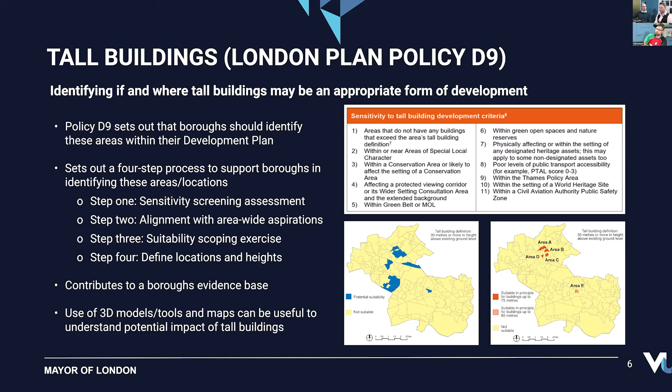Going back to what I was saying earlier, I think the use of 3D models and tools and maps can be really useful to understand that impact of potential tall buildings. Very hard to do that in 2D. It's definitely easier, I think, if you can get a 3D perspective, definitely.

So I thought I'd now talk about another bit of guidance, the Optimizing Site Capacity, a Design-Led Approach LPG. This document sets out the London Plan's design-led approach and relates to policy D3. It's about requiring the consideration of design options to determine the most appropriate form of development for a site that responds to its character and capacity for growth, by setting design parameters, or a strategic design code for specific sites or areas being master planned, to provide clarity and certainty over development and redevelopment. Good growth across London requires development to optimize site capacity rather than maximize density, and this guidance provides a framework and process to undertake this.

The document also provides a framework to determine a site's indicative capacity if it's a residential site or has a residential component. It uses a toolkit which itself uses SketchUp to model the massing and layout of development sites in London. There are many 2D and 3D models and software out there that can be used for this. We use SketchUp in the model, but there are others, such as VU.CITY, and many more.

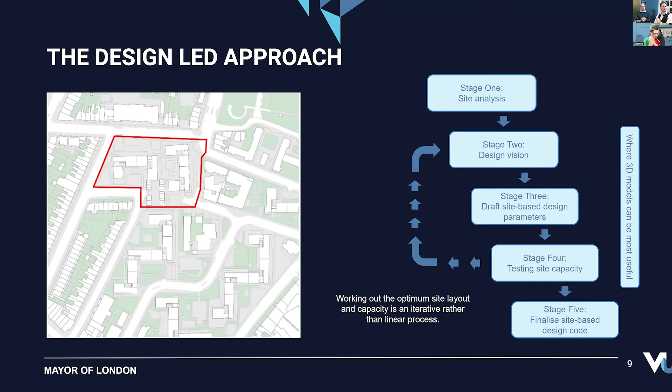We have a minute until we have to move on, Alan. Oh, goodness. Okay, yeah, that's fine.

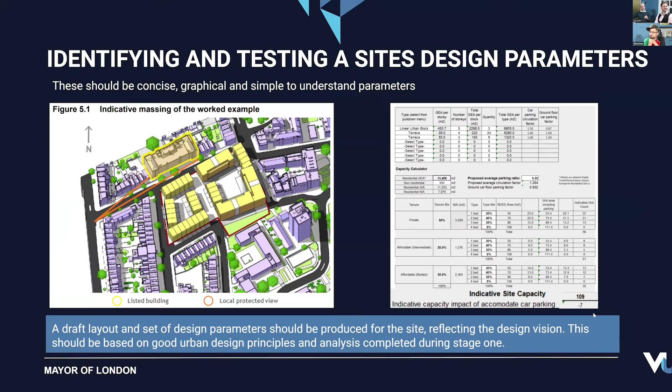This slide shows what you can do with 3D models. We use SketchUp in the guidance itself, and it's important to reiterate that the design parameters should be concise, graphical, and simple to understand.

You can see that by doing this, you can look at the site through different views - looking down different streets to understand the enclosure ratios and what it feels like on the street, as well as other views.

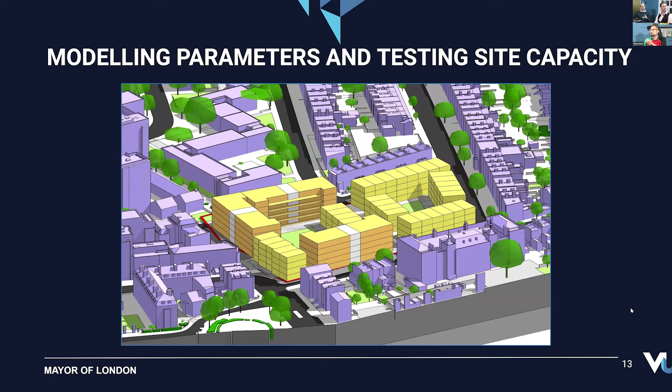Before I hand back to Christopher, I'll touch on strategic and local views, relating to policy HC3 and HC4 of the London Plan. The London View Management Framework, or LVMF, sets out 27 strategic views across London, focusing on particularly 3 of the most strategically important landmarks. The LVMF provides protection of these views via designated protected vistas and protected silhouettes, as well as management guidance for each view.

It's worth saying that we're actually going to be looking to review this guidance and update it, and we're going to be undertaking that in the coming months. We also aim to, through this process, provide more guidance on how boroughs can be setting local views, and I think 3D tools and models can be really useful in that respect.

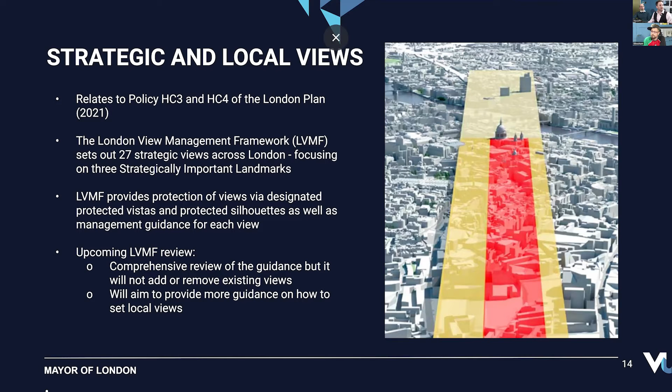But before we get into the tools, why visualize your project? Why bring everyone into 3D in a live environment? Because politics, I love this quote from Naomi Klein, politics hates a vacuum. If it isn't filled with hope, someone will fill it with fear. So if there is a void of what does this development look like, from where, then you are just opening yourself up to all sorts of fear. And we see it all the time.

So anyone who subscribes and buys into VU.CITY, and this idea of just visualizing and being extremely transparent right from the get-go, buys into this idea that if you want to really take control of the narrative, then you can get there first and be precise about what can be seen and where.

What are we? Well, we are a smart city platform, and our goal is to leverage cutting-edge technology, including 3D modeling, artificial intelligence, and geospatial data to enable cities to be designed, simulated, evaluated in a virtual environment, leading to more informed decision-making, better outcomes for communities and the environment. And it's putting everyone together in one interactive platform to be able to have these lovely live conversations.

This is how the model will one day bring everyone together. We're very much working on web map technology to bring in citizens more, and that's definitely something that's in the R&D we've been looking at for a long time. Department of Leveling Up, the round 3 funding did for the Southampton web map project, and that will be filtering its way out in the coming couple of years. But at the moment, we are very much specializing in supporting this relationship between local planning authorities and the builders.

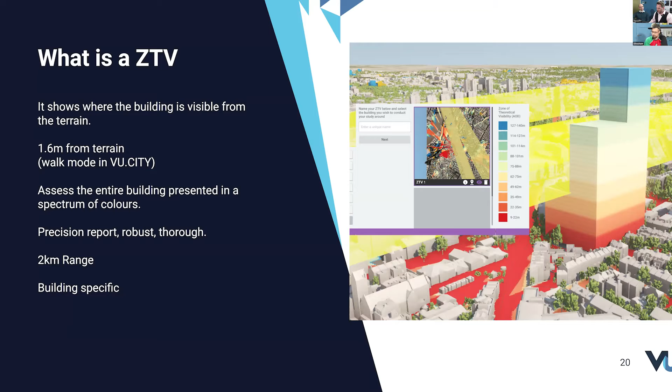And we have a 2-kilometer range on our zone of theoretical visibility within the platform. If you want something bigger than that, we could turn that around for you as well. And this is what it looks like from above. So this is something that Ethesham rendered. You can all render these, and they look very lovely.

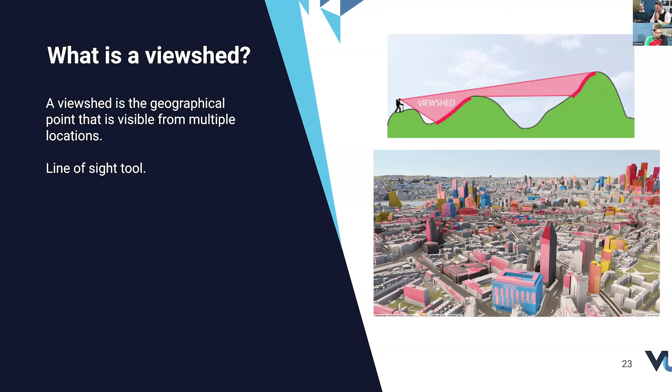One more thing about this, we have 4 cameras and 4 points, and you'll see in this diagram here that we have different levels of coloring there. The dark pink means it can be seen on all 4 cameras, and the lightest pink means only 1 camera can see it. So that will indicate what it may be able to see. But line of sight is very much like a ray of light, and the way we do it is we create it through the camera study.

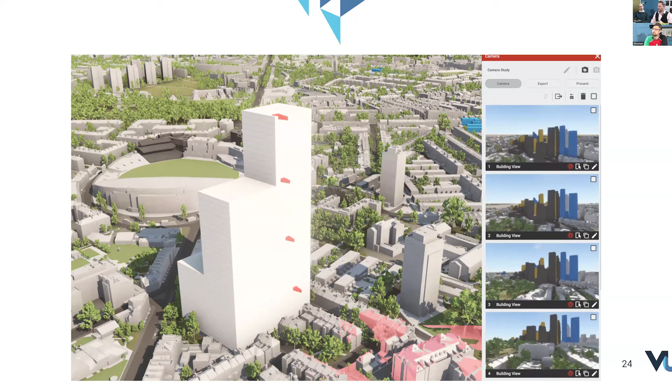And as you can see, you place the cameras on here. In this particular use, we're not looking at it from a subject point of view. We're looking at it from an object point of view. So if you want to see what part of this building on this side is visible, that's when you would use it, and you would stick the cameras on the side of the buildings.

And this is what it looks like here. This is another render I did, and this is what all those 4 cameras can do. So that side of that building, you can see its visibility really clearly pointing straight out. I believe that's easterly.

So putting them together now, zone of theoretical visibility, it's a static report. It's based on one whole building, and it's around that radius of the building. And once you've rendered it, the report is done. With viewsheds, they're point focused, it's live, and it doesn't have a limit. It will be on the limit. The only limit is however many tiles you can load. And the best place to do that is a camera study.

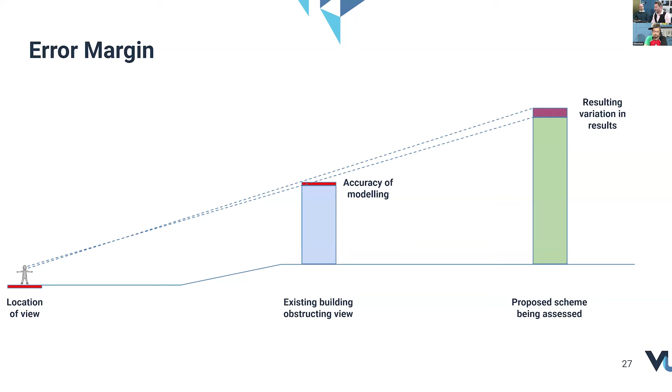Let's have a look at these questions coming in. So Alicia, hello Alicia. Does this feature work for masses built in VU.CITY or only imported models? It works for both. And yeah, in the demo that I'm going to do today, I'm going to create a building in VU.CITY. I'm going to create the massing live. Okay, and we may have some feedback issues. Okay, fine. Go for it, Ethesham.

Yeah. Okay, so I guess the first thing to introduce is the hub. This is where you will launch VU.CITY, but it's also where exported screenshots are saved. It's also where you'll be uploading your FBXs or other data types. And you can, when you launch VU.CITY, you have the choice of launching by the desktop or the cloud. I'm going to launch via the desktop.

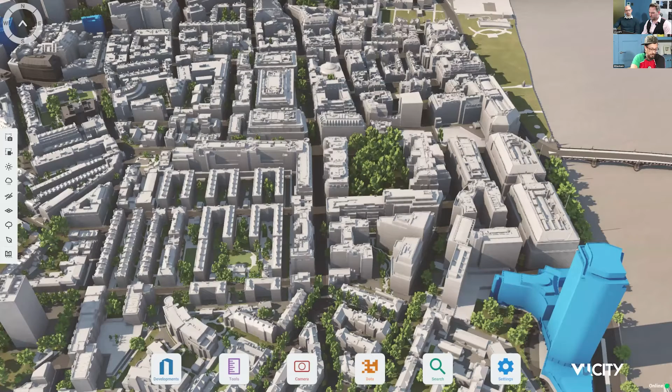I'm going to download - there's been an update to our assets. This is a section where, on a daily or weekly basis, we'll be updating the VU.CITY model. It could be minor changes like adapting a building or updating a whole tile, or adding a new tile to a city. We're in London, but we also have coverage in Belfast, Dublin, Manchester, and Birmingham.

I'll start by loading up the scene, and I'm going to create a massing somewhere which is obviously not going to be feasible, i.e. in Parliament Square. We're picking this area because we want to use the Houses of Parliament as a sensitive building whose visibility we want to protect from sensitive views. So I'll go ahead and create a massing now.

I'll press Shift to snap at 90-degree angles, and I'll make this building 60 meters in height.

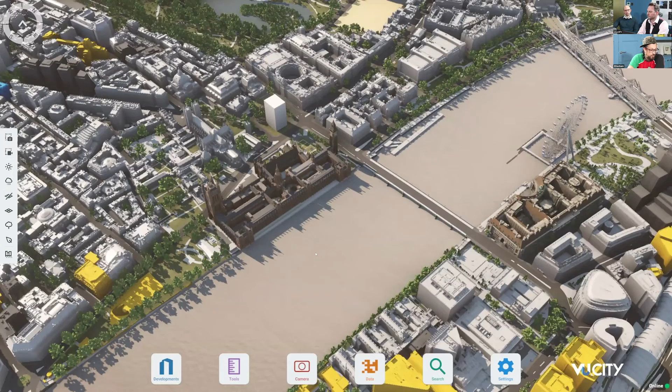The first thing I'm going to do is run a quick ZTV on this to assess where it will be visible from, as Chris mentioned in his slides.

For ZTV, all you have to do is type in the name of the report. I'm going to set it to 1.5 square kilometers in range, and I'll set the granularity to 9 - basically this suggests the size of your sample area, so each square will represent 9 by 9 meters.

Obviously the smaller, the finer you go in detail, the longer the ZTV study will take to render.

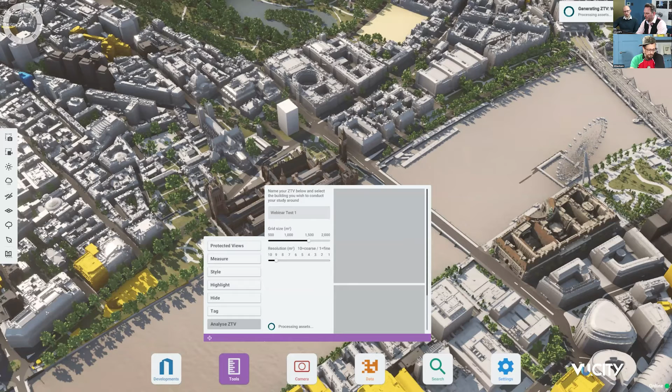It's worth reiterating that I was around before VU.CITY existed, and this process would typically take a couple of days to a few weeks to produce, depending on the size of the area. So one big gain in using a live platform like VU.CITY is that we're hoping we can really speed up the planning process and the ability for people to rapidly iterate their massings and designs. I think that's what it comes down to - how quickly can you run these reports, and how hard is it to actually get to the point where you get the report.

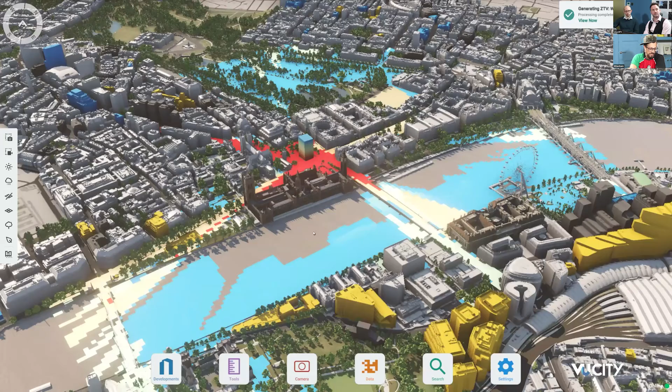All we've done here is type in the name of the report and tweaked two things, and here we go - here are the ZTV results. As you can see, the building has been split into 5-meter increments, and everywhere that's red on the ground at 1.6 meters, we'll be able to see the bottom of the building. The blue areas on the ground and the yellow areas are between the middle and the top of the building.

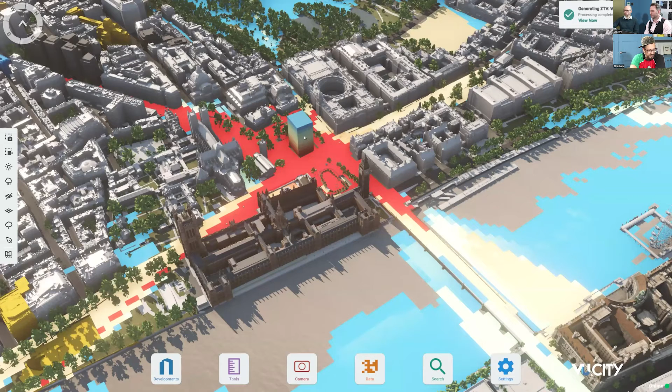I would like to assess this further. I understand that various heights of this building are visible around the area, but I want to find out a bit more about that - I want to assess the building more. So I'm going to run a viewshed on this building.

The way we do that is by setting up our camera study. I'm going to select that building as the focus point, and I'm going to place my cameras based on these results. I'll go down here onto Westminster Bridge, back, maybe the other bridge here.

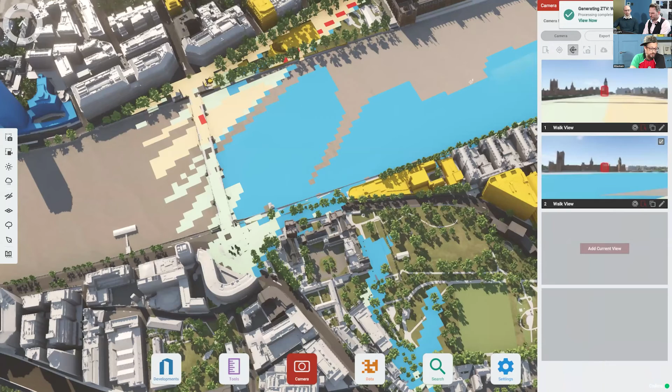Also worth mentioning is that our ZTV results and our viewsheds do not take into consideration the trees. So I'm actually going to switch off my trees, and to improve performance of VU.CITY, I'm going to turn off the shadows as well.

I always turn off shadows - you only really need them on for daylight studies. I feel VU.CITY users take it for granted that we have almost instant access to the model, that it loads in and out really quickly, and that we have shadows. But these are the most intensive things for an app to do - to load in millions of polygons, and then to double the calculations by adding shadows is really performance intensive. So it's worth mentioning that if you don't need shadows, turn them off for a better experience, because you're really putting your graphics card through its paces.

Ethesham, Wolfgang here has just asked if it's 9 meters squared or 9 by 9. It's 9 by 9 meters - it's not 9 meters squared, Wolfgang.

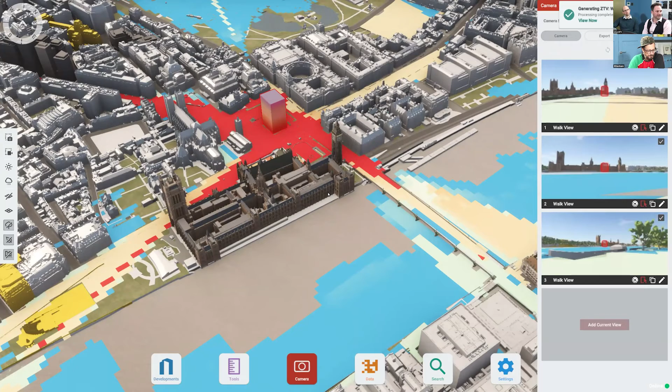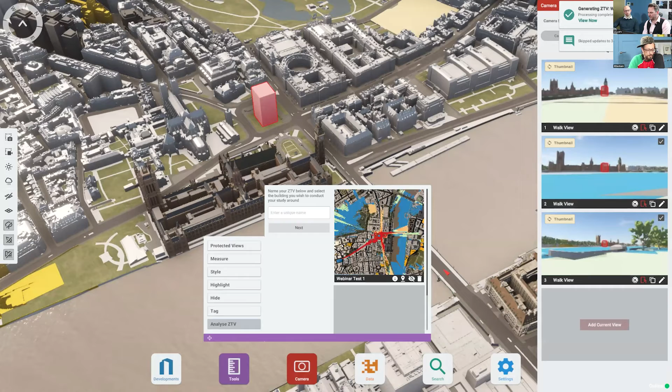Okay, so I've set up my camera points. I'm going to unhighlight my massing and turn on the viewsheds. The first viewshed I'll turn on is going to be the one on Westminster Bridge.

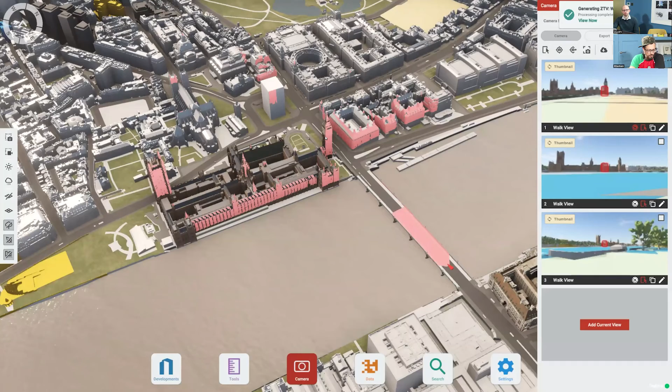This calculation is a one-time calculation, so it won't happen every time I click the button for the other views. So here we go, here is the first viewshed result. And as you can see, from the viewpoint on Westminster Bridge, Big Ben is massively occluding this building.

Let's turn on the other viewsheds here. You can have up to 4 concurrent viewsheds at a time. If you saw that yellow flashing, basically every time you hover over a thumbnail, it will isolate the viewshed results. So as I go down, I'm able to see, okay, this camera emits this viewshed. And if I turn them all on, you have the accumulation of all those viewshed results.

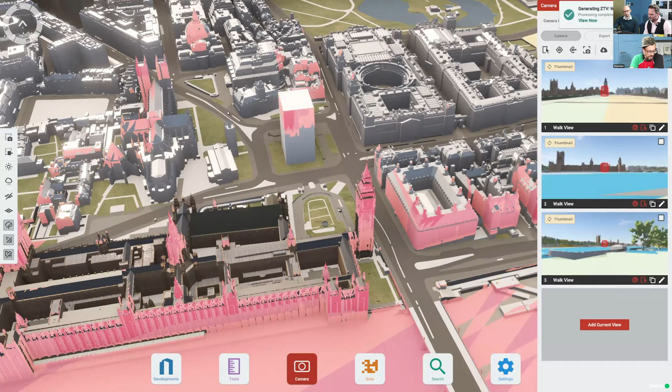That's a pretty incredible shadow it's casting as well. I think it's testament to the accuracy of that LOD4 model.

So based on these results, I can understand that if I just reduce the height of this building by half, it will no longer be visible in any of those viewpoints. But I saw that one side of the building is actually less visible than the other. If I go back to 60, you'll see that if I take away the southern facing walls, maybe I can get a bit more height than 30 meters.

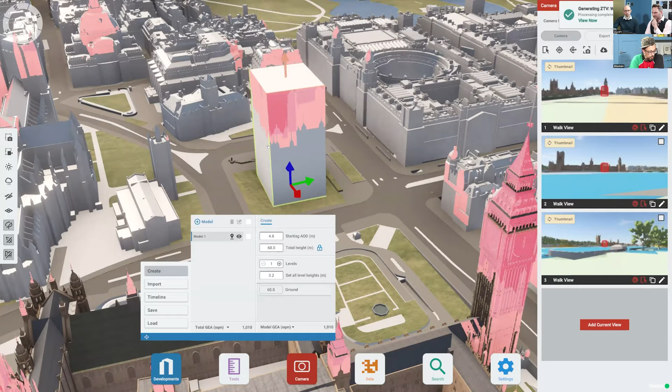So I'm going to now jump into my massing and change the footprint of this building.

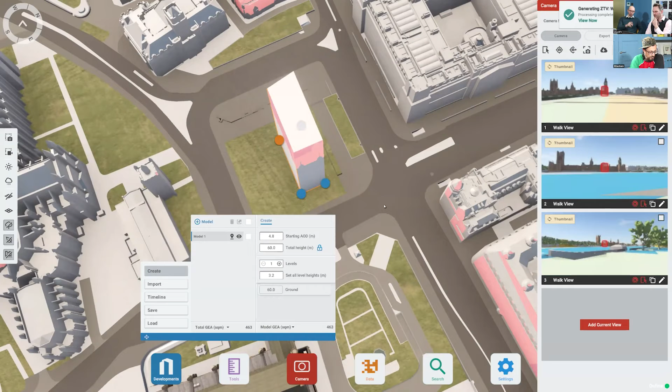And it's worth saying as well that one of the LVMF views is actually from Parliament Square. So I'm not sure this building at all would ever satisfy that. No, but we won't go there with this.

This is a completely hypothetical scenario. Indeed, absolutely, indeed, just to reiterate.

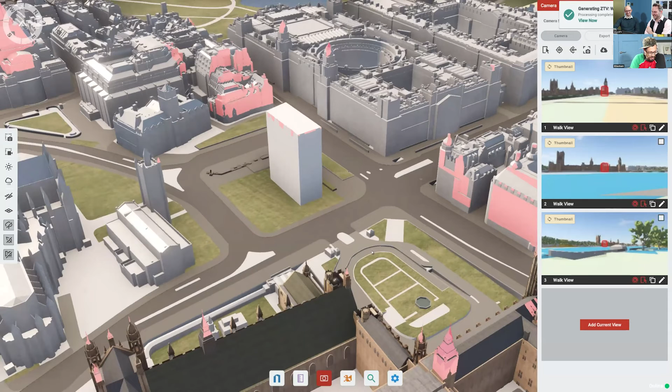Yes, so I've now reduced this massing by 40 meters. As you can see, there's a sliver of visibility, and if we go into the viewpoints, we can see what that impact actually looks like.

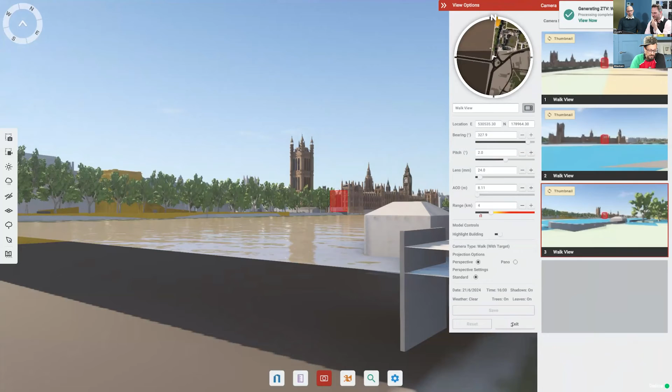So I'm going to jump into these positions. I'll turn off the viewsheds actually, and I'm going to just scroll through the viewpoints. There you go. And actually, I want to scrutinize this building even further and use the viewsheds in a slightly different way.

So what we just did there is we did a zone of theoretical visibility to find out what could be seen. We then went to the points and placed cameras. That's using the line of sight, about the subject, as if the subject is standing here and looking there, what can they see? That's how we were able to reduce this down so that you can't see it towering over Parliament.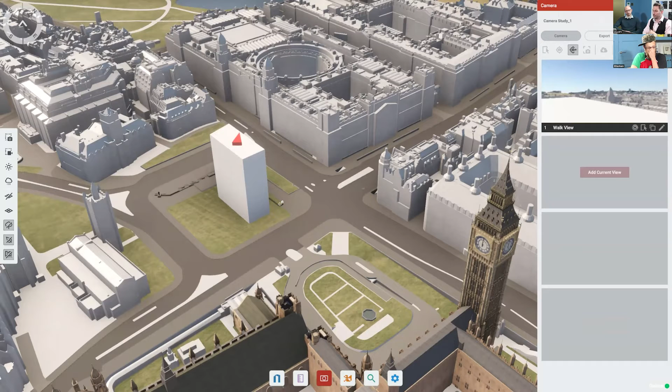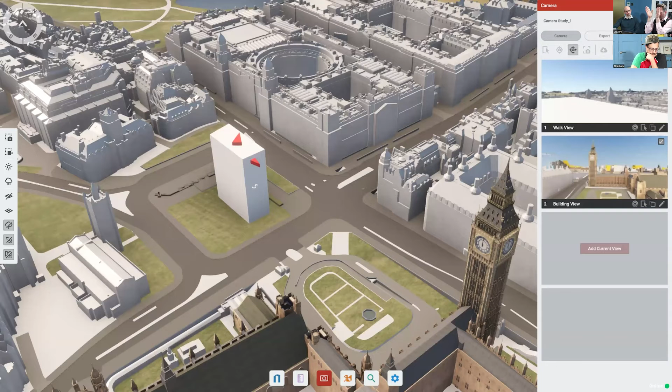And now we're using the viewsheds to do something else. We're now saying, well, who can see this object? How many subjects can see this object? This is where the Pano 360 comes in, because this is where we're making the whole camera wide. We're not looking at just one human sight, we're trying to look at who can see this area. So this is very much a case of subject rather than object. We're seeing which subjects can see the object rather than the other way around.

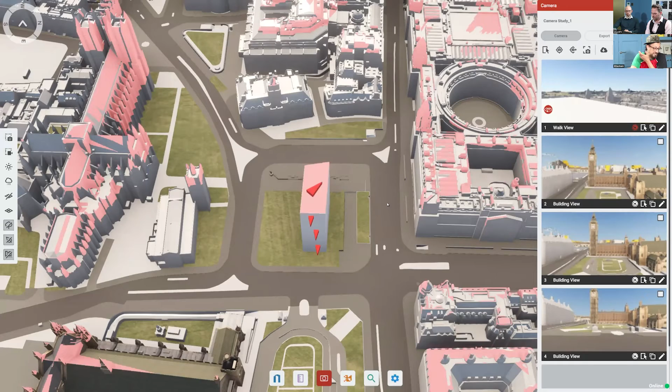Okay, so while you were speaking there, Chris, I set up the camera on top of the building as a 360 camera. So that, as you may know, can be exported as a 360 camera and then viewed on web pages as a 360 view. But I'm going to turn this view into a 360 view shed. So if I zoom out, you'll see, this is essentially behaving like a ZTV now.

And one of the key benefits with using the viewshed to do this is that it's actually limitless. We can scroll to infinity and the viewshed results will still show based on what tiles have been loaded. If you're on the desktop, and I was doing this the other day, I've got the cloud to do about 6 square kilometers.

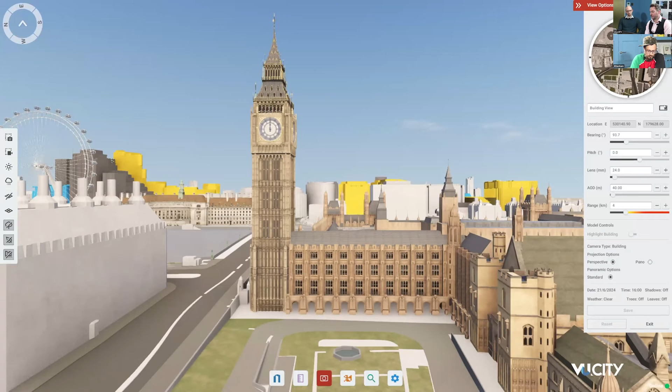That would increase the range you can do on a ZTV now quite significantly, especially if you put the object at the bottom of the screen and had the whole northerly view, then the easterly, westerly, south, pasted those all together, and also rendered those in an orthographic, like a top-down view. It's like a bird's eye, so you can zoom in. We can probably have a look at that once we finish this.

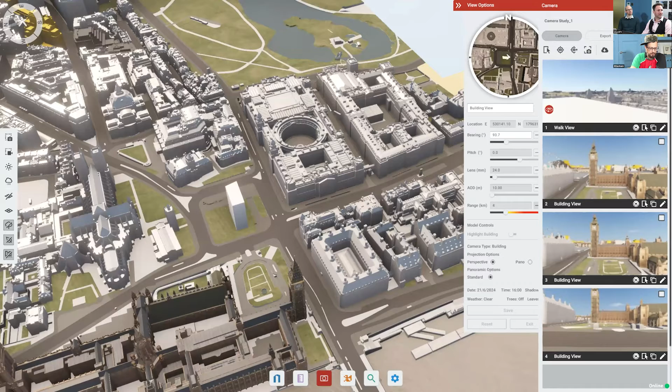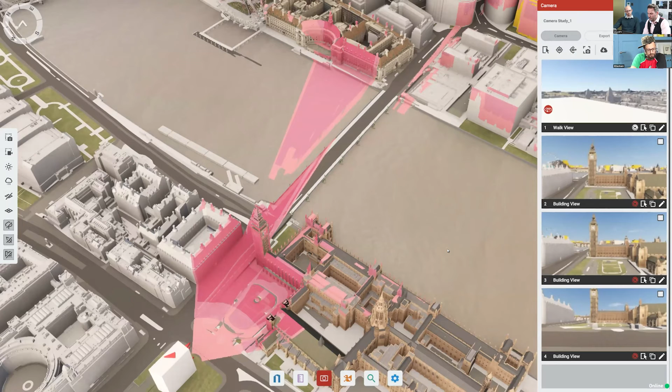Someone has asked, does the desktop run better than the cloud? This is an interesting question because on the desktop everything is local. So if you have a powerful enough computer to run a desktop, and they're not the most expensive gaming laptops, you could probably get a tower for £500-600 that would do it, and you can get laptops around the $800-900 mark that will do it as well. But you can run the desktop.

All you have to do on the cloud is tweak the resolution, make it 1920 by 1080, and we can show you how to do that. I can say a little bit about the difference in performance. Generally the graphics cards running the cloud are very, very powerful, so it should be smoother on the cloud in many instances.

The reason I'm not doing so in this webinar is that I don't want to throttle the web connection we've got, because at the moment I'm screen sharing and running VU.CITY. If I was running on cloud, I'd be streaming the video signal of the VU.CITY cloud instance. We decided to do it this way today for that reason - to take the burden away from the internet connection, I'm running VU.CITY on my laptop. If anyone has children at home who like streaming games, you'll know the second they're playing that game, your meeting is done. It's very much the same - you are streaming a high performance model through a gaming engine, so we just need to bear that in mind.

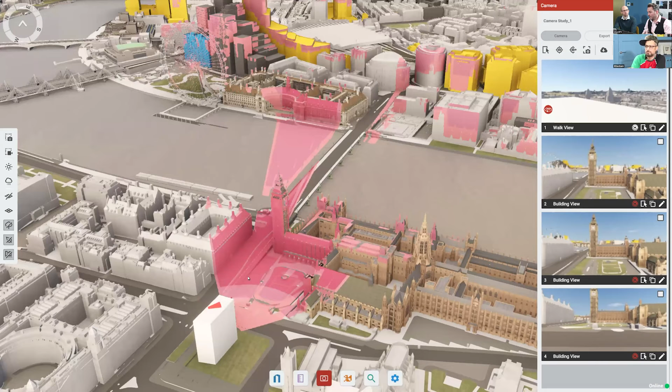And I'd say, don't even use Wi-Fi repeaters either, because that introduces an extra level of latency. What we're trying to do is make it as simple as possible, which is why we're actually improving our stack and making it more and more efficient. Some of you have noticed the platform is more stable than it's ever been, and the cloud experience is better than it's ever been. We're just going to keep doing that.

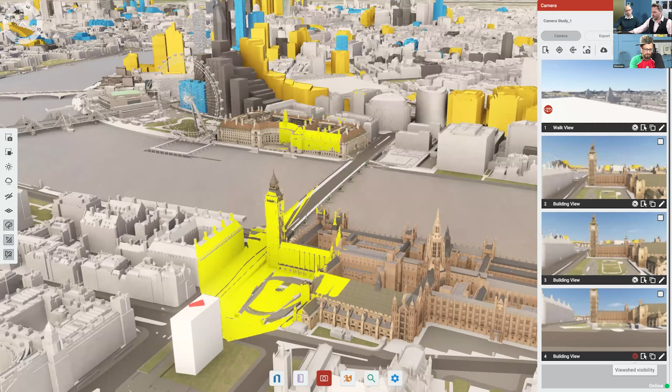Yes, correct. Ethesham, if you want to just show that. It's just a camera study. All you're doing is setting up a camera, and whichever camera you want to turn into a viewshed, that little fuzzy sun almost icon represents a series of view cones, viewsheds, in 360 degrees.

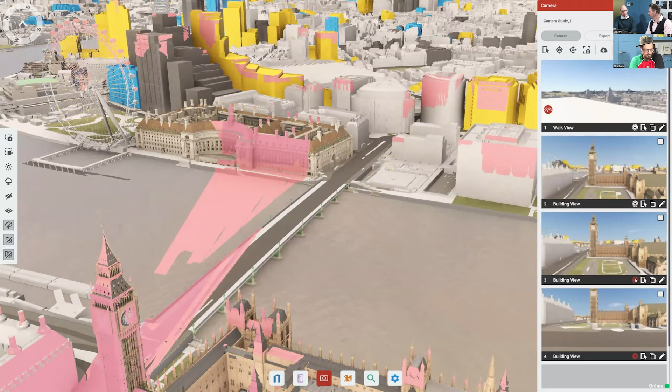Can I ask a question? We've looked at putting the points on a massing that is theoretical. Could you do that with an existing building? I'm thinking particularly a kind of church spire or something like that, so you'd be able to see the local views that have a view to that heritage asset or that local spire.

I can do that now. Shall we do that? We did that on St. Paul's the other day when we put them all around the bowl, seeing who in London can see that. In fact, I'm going to render those.

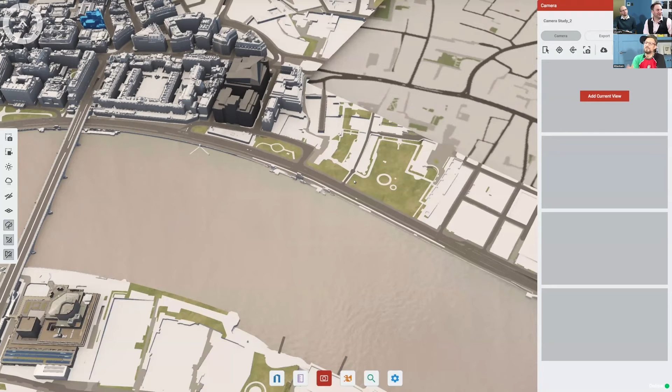I think that's a really useful aspect in terms of Matt Felton, a character from the past. Lovely to see you. Matt is one of our former VU.CITY team, spent many great years. In fact, Matt worked on viewsheds, didn't he? He did indeed, thanks for all your hard work. He's at Bentley now. Matt, thank you so much for joining us today.

So what was the maximum viewshed line of sight distance? Well, the distance is infinite. It will go if you just keep scrolling in VU.CITY, it will just keep shedding the viewshed. But then you'll start to unload tiles as you're moving away, so it's dependent on how many tiles you have loaded in your scene, but it is technically infinite.

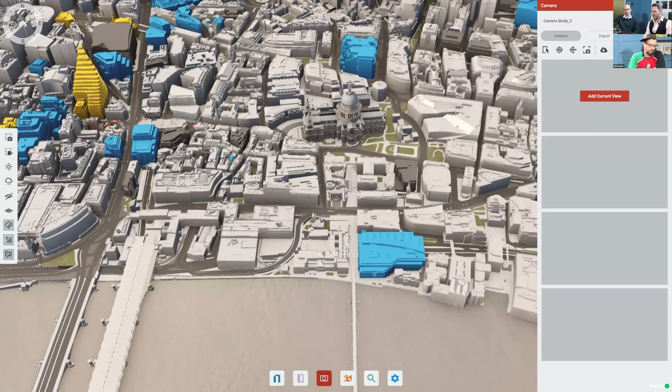So as, or at least the bounds of the tiles, yeah, but in loading those tiles we just have to be sure that anytime we're going to load a lot of tiles and look in one direction, we need to do that in a camera study. That's the safe place to do that. And I got it, I think, 6 square kilometers, and it did that all orthographically top down quite easily.

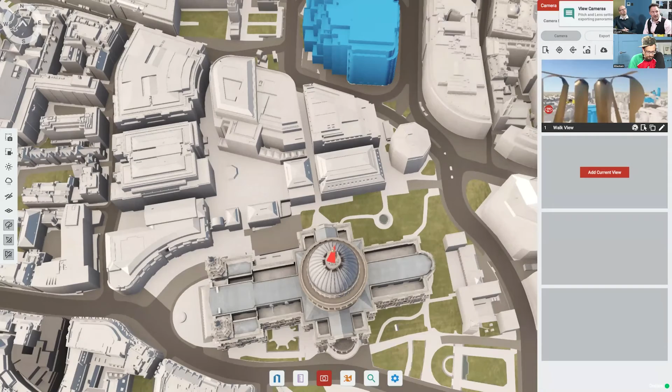An anonymous question here: can you use this tool in a countryside setting? Does it pick up terrain levels? Yes, it does pick up terrain levels, but obviously it won't pick up trees, unless Ethesham, if you put in your own trees as models, it would pick those up. Yes, it would.

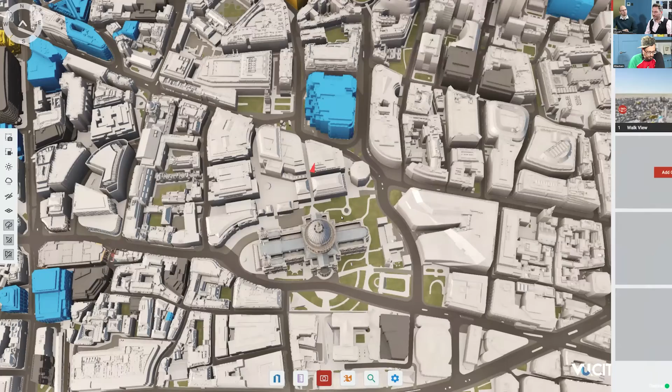So if you do want to add trees, you obviously wouldn't want to add every single tree in the platform, but if you're looking at a more narrow view and the trees were particularly important, you could place trees and replace the VU.CITY trees with a standard tree model, and that would work. I would suggest not having too high a poly count for your trees if you do import them - try and reduce the poly count.

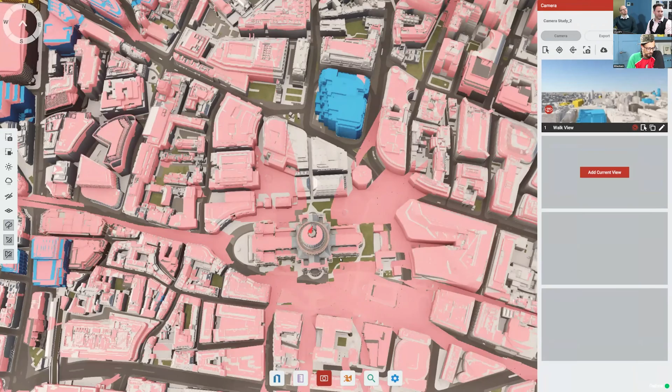And one more here from Matt: can you export the viewshed as a shape file or an image? Not yet as a shape file, but you can export it as an image.

So what I'm doing now is I've placed a 360 camera on top of the spire of St. Paul's, and I'm going to set up another camera right here and make it perfectly aligned to north and facing down, and export this image. There you go - it's just a case of rendering the images live through the camera studies, through the export. And here's the St. Paul's spire. I'm now going to export this image and let it load.

I think someone asked me about a shape file - I think it was Andrew - someone asked me the other day about exporting the shape file.

VU.CITY still offer the service of rendering ZTVs on a case-by-case basis outside of the app. When we do that, we render it into a geographically located image, which can then be imported into GIS software. That's a common workflow people require with their ZTV so they can use it in QGIS or other GIS platforms. So we are aware it would be useful for our ZTVs to also be exported into a GIS format usable in GIS software, so we would like to do that.

It's just that there are so many things that we could and should be doing, and we have to find the right strategy and order to release these features. But it's definitely on our radar - I would love for that to be enabled. We would definitely like to be able to do that. Shape files would be very useful to anyone.

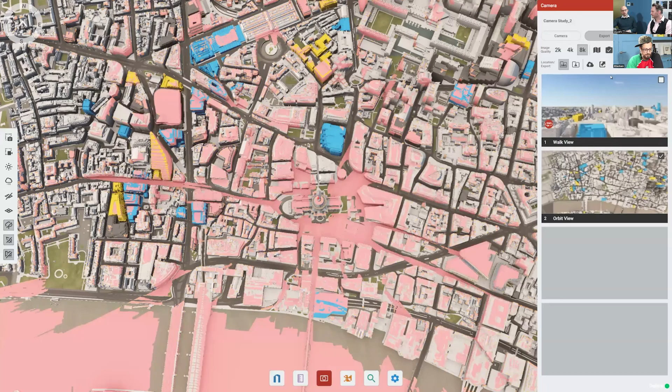Atmospheric haze isn't accurate - we do have a fog system and a daylight system that has fog, but I wouldn't say it's based on physics, it's a visual effect. It is quite nice though. That's a really good point, because that's an aspect the LVMF sort of considers and is aware of.

While we were talking, I exported this image in the hub, and here it is. You can zoom in and inspect it in lovely 8K - I've been doing some 8K renders on this and it's extremely powerful.

You may notice this open area here - I was a bit concerned, but it's because where I placed the camera is just in front of the spire, so the spire itself is occluding this section of the results.

When I looked at St. Paul's the other day, we had to stick the cameras on the outside of the bowl so it wasn't in the way - you hadn't have those ornamental pillars in the way.

So I'm just using the hub now to annotate this area. And that's another feature - you can now annotate on the hub photos and talk in greater detail.

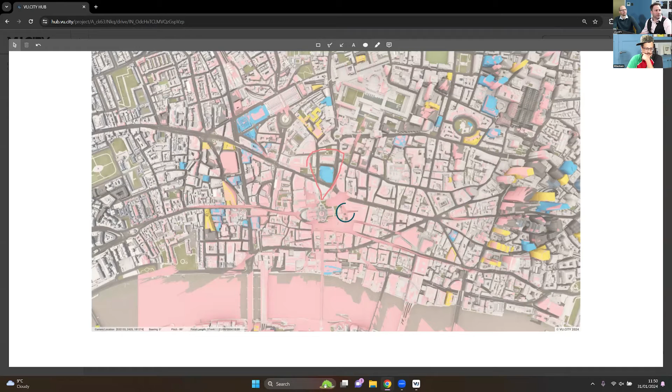Another question here: can we remove an existing building model and put a new one on it, like a building extension or a rebuild project? So that's essentially just the hide tool.

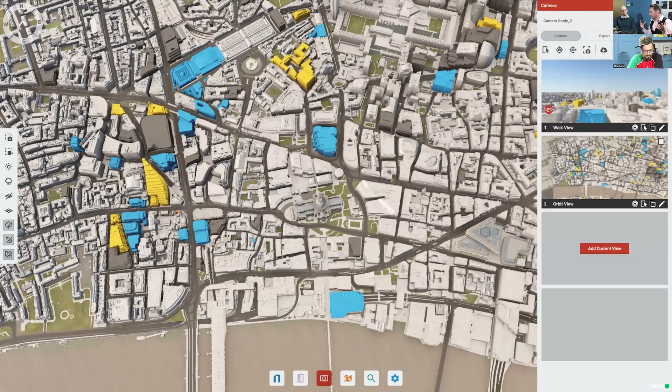Our hide tool just had a big update end of last year. You can remove individual buildings, but you can also draw whole sections of buildings and trees to be removed. I can show that right now.

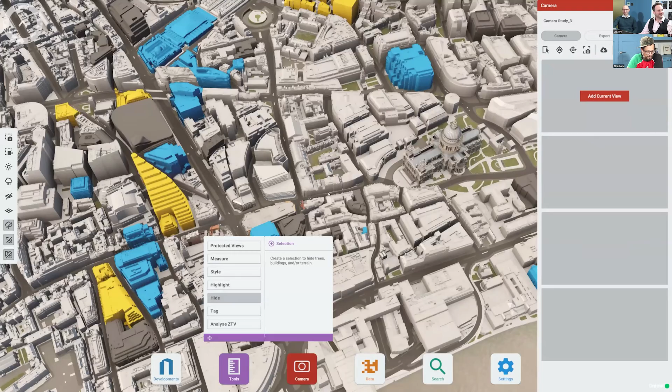If you want to go to the next question - maybe split St. Paul's in half, Ethesham? That'll be good. Don't think I'm particularly happy with that. No, let's not do that, that's too close. It's difficult to pick a building to remove because any building could be a sensitive building, so I'll just remove a piece of ground here.

Every time I do VU.CITY training sessions, the council halls seem to get it the most. Every time I do the hide tools, everyone goes for the place they work.

Here with the hide tool, I drew an area and hid the terrain, the trees and all buildings. If I extend this area, it will remove the buildings and the terrain - and that's the slice tool as well. Then you can theoretically bring in your master plan to fill that space.

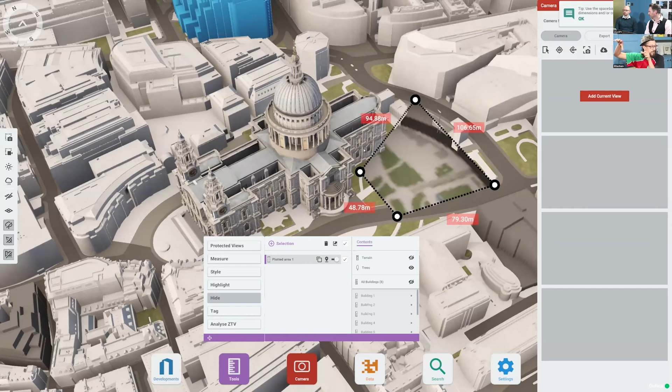And you can export that as well - this area can also be exported as a GIS data file, a DXF. So you can take this area and bring it into your GIS package or into AutoCAD or 3ds Max to use it as a slicing tool for your master plan.

So it comes back in geographically located perfectly to fit the VU.CITY model. And Bill's saying that pink's quite pale, it's quite difficult to see between the pale grey. But I really hear you, Bill - I apologize for that, we're going to work on maybe that. We can do a special build for Bill that's not pink. I'll email you, Bill.

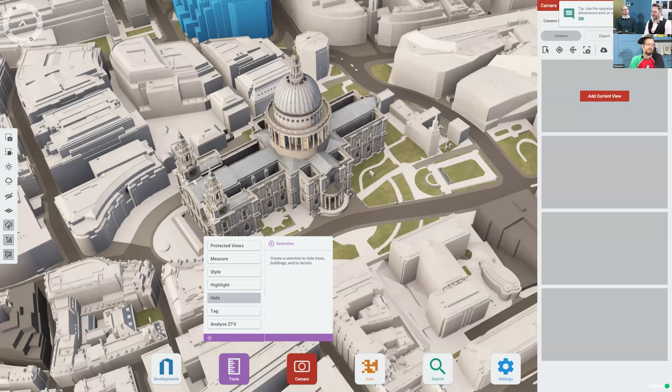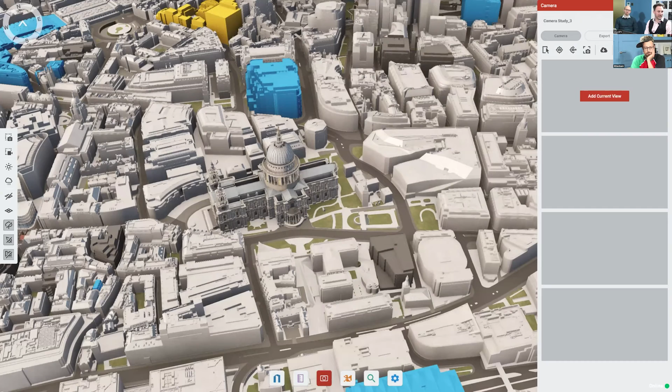Any further questions from anyone? We still have the open floor, we can do a bit more reverse massing. Does that explain everything? Is everyone here a VU.CITY user, and have we shown you how to do this? Or is there anything we need to cover in more detail? And who is new to VU.CITY and might want to ask more questions?

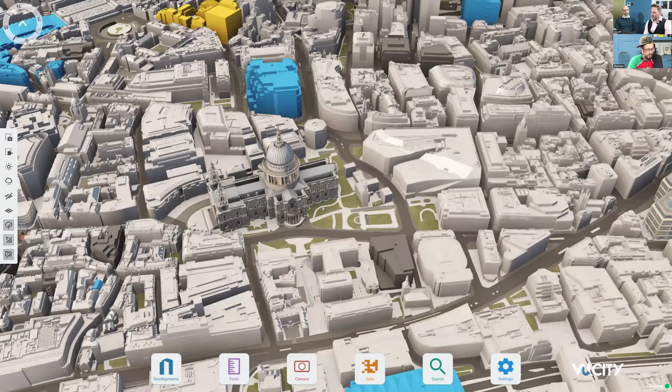Okay, so Ethesham, let's go to the LVMF around the Big Ben area, because one of those intersects with the massing we just did, and let's see how it interacts with that. Oh, the Houses of Parliament.

Can you overlay existing and proposed buildings on a site? The VU.CITY timeline has proposed buildings and buildings under construction. Let's have a look at the timeline, go to the City Square Mile, and see how that's changed since 2016. This is definitely one of the most powerful features here, the fact that you can time travel.

So I've gone over to the city cluster, I'll let that tile load. This is the developments timeline you're looking at. There's a key here: yellow is consented, blue is under construction, dark gray is completed. This is 2016 when we built the base map, and you can take these layers on and off, and rewind to see how things have changed since 2016. There we go, so that's 2016, and you can see the Shard right there. Now it's completely engulfed almost from this view. So I think that answers your question.

Is there an easy way, for example, in a scenario where a site has been redeveloped, so its existing building, you're manually removing it and then putting in the massing of your new building? I'm just wondering whether you could then see the before and after.

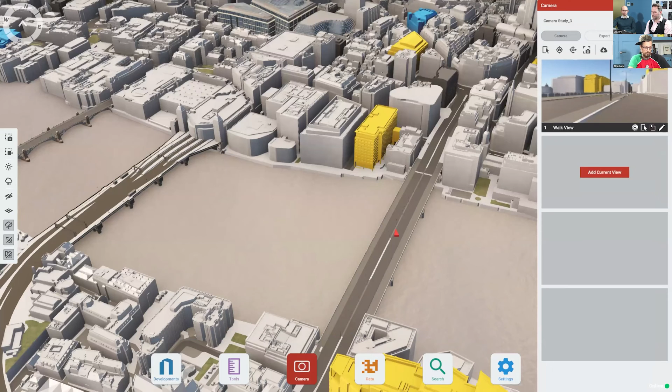Okay, so in this viewpoint we have this building in yellow, but I want to quickly flick between this building and a previous state. So I'm going to duplicate this viewpoint, and in the original one I'll go backwards in time on this timeline, like that, and save that. So the movement of the timeline is saved in the state of the viewpoint. If I go into present mode and look at that, I can flick between these viewpoints.

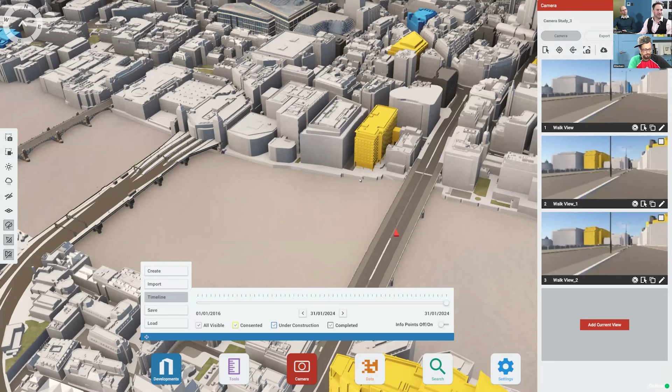This is an update some people may not have heard of, the visibility states, because I don't think it tells you what it does. What it does is let you have lots of different versions of VU.CITY within a camera study, and you can send those states back and forth through the main scene and through each camera. You can put different models in, different data layers, different weather, different times of year. It really does make things easy rather than having to go to the main timeline to change them all the time.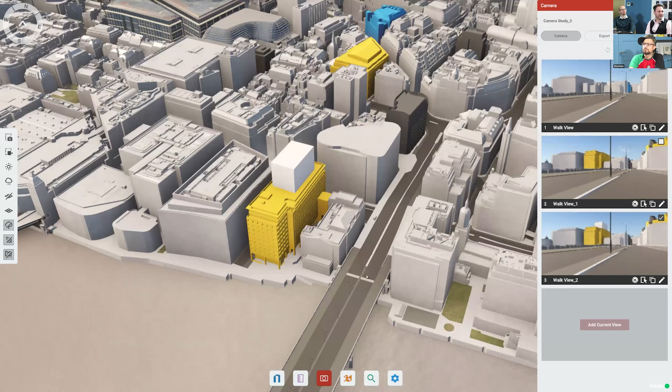So we have walk mode, which is 1.6 meters. When you put the camera, if Ethesham clicks on add single camera, you can see how he's hovering there, and that will stick to the terrain. That's called walk mode, 1.6 meters above the terrain. Here you can walk around, you can even record videos using the screen recorder. This is the standard, 1.6 meters, so that's for roads, fields, whatever.

Also in this panel you have the ability to change your bearing, to change the pitch, to change the lens type. Right now we're in a 24mm lens, but I can change it to like 40.

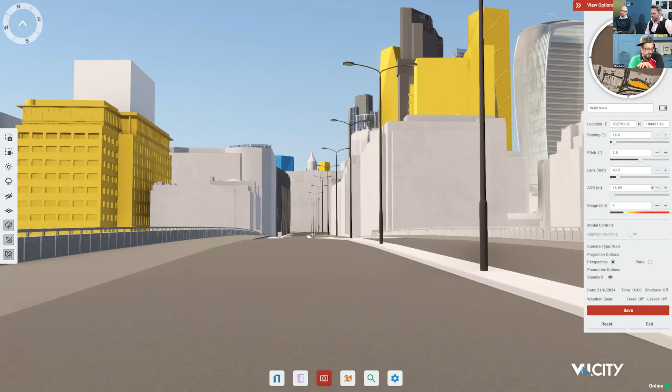And you can change the height above the ground. When you're walking, it's 1.6 meters, but you can manually set another height, so you can stick yourself to a building level. But if you keep moving, it won't stay at that exact height above the terrain. If you want to explore the city at this height and walk forward, it won't stay there, it'll go back to ground.

I think being able to raise and lower the viewpoint is useful. Although the default is 1.6 meters, if you can lower that, you can get the eye line for people in wheelchairs, pushchairs, and things like this. So I think that's useful.

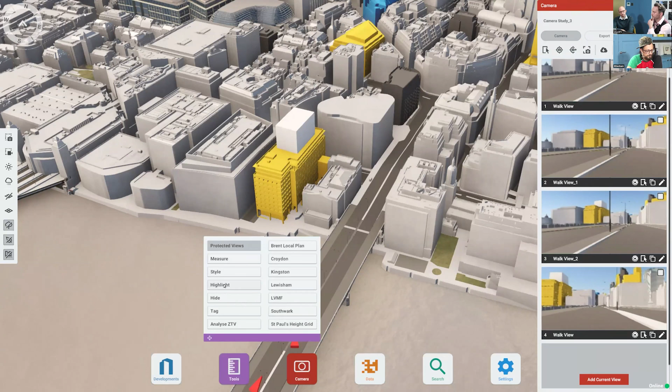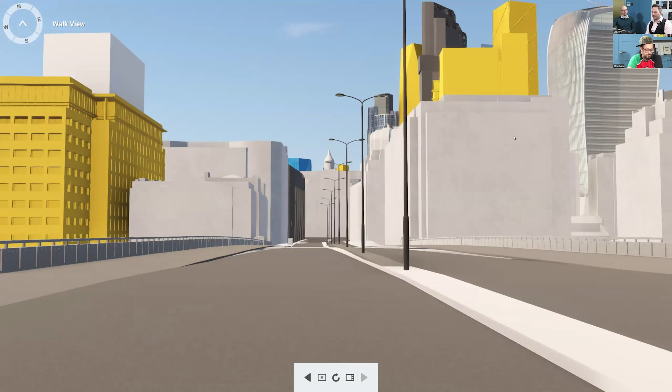Okay, and Todor, can you add visibility states after you've set the views? Is this done via duplicating views you've already identified? That's a great question.

So you may have noticed that in this thumbnail, the massing is white because I saved this viewpoint before I added the color green to it. If I want to add green to this view and this view as well, I can push the states of the main camera onto those viewpoints. So I'll do that now. They will update, and it will also update the thumbnails, because you can push the state without updating the thumbnails, which requires rendering, or you can push it and update the thumbnails. I'm choosing to update the thumbnails so they appear green. I think that answers your question.

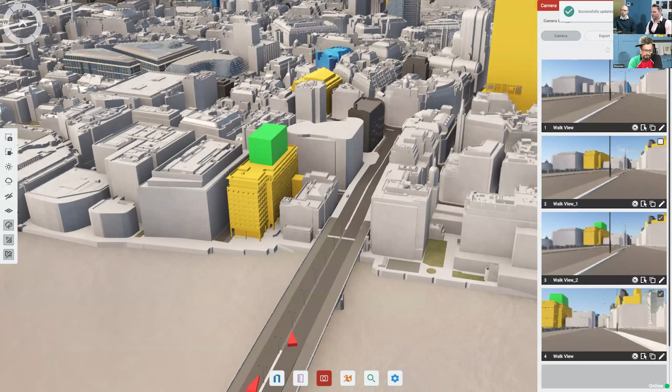And you can also take the states of the viewpoints and push them back to the main camera. I'm going to take the state of the first viewpoint that had the timeline all the way back to 2016 with this massing removed. So I'll pull the states from this viewpoint, and there you go, it changes the timeline. So the camera study is almost like a save, all your different states of a project can be saved in each camera shot, which will save so many people so much time, especially when doing all your different iterations.

Jeremy Yen, thank you for your question: is it possible to render street elevation sections? There's a number of ways of answering that. We need to be able to enable orthographic view for street elevations, and that's definitely on our roadmap, we're actually experimenting with that at the moment. But to have section views is an added level of complexity, requiring slicing the model and filling it up, which is a really complicated set of calculations and not as easy as it seems.

So are you saying you chop it and it's sort of hollow? Yeah, it's hollow, when you chop it by height it will be hollow. I'm pretty confident we'll be releasing an update eventually, I don't want to say when, where you can have an orthographic view. You can go into the street at ground level and have an orthographic view where all the vertical lines are completely vertical, so there's no perspective distortion on the camera. That enables elevations, but section views, I can't really say when we would tackle, because that's quite a meaty dilemma to solve and requires that GPU processing.